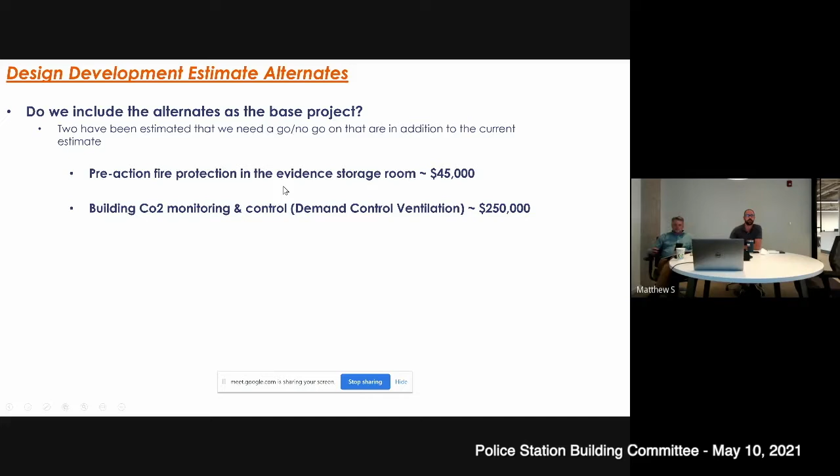I think the pre-action fire protection system was pretty well understood and pretty straightforward from what I gathered at the last presentation. So I'm not going to talk any more on that, but I did bring Brad from CES, and he's got a few slides on the second piece of this. So I'm going to turn it over to him. Sure. How's everyone doing tonight? So I did want to jump on this tonight to talk a little bit about ventilation within the building and demand control ventilation, just to help everyone understand what this add really entails.

So first and foremost, I want to start the conversation by clarifying that as our design sits today, every space within the building is ventilated to meet the current codes. If you recall from some of our previous conversations several months back, we're utilizing a dedicated outdoor air system to ventilate the building, which is a very efficient way of ventilating and provides very good indoor air quality. So that's kind of our base starting point.

Demand controlled ventilation comes into play where we can monitor CO2 levels and in fact reduce the amount of ventilation provided in a certain room. I'd say this is applicable to the training room, patrol, roll call, some of those spaces that can have high occupant densities for a time period, but then can be reduced elsewhere.

Jeff, did you have a question? No, I'm sorry. I was trying to make the images bigger. Oh, it said you raised your hand, so I didn't know if you were already questioning me. Yeah, whole thing's questionable.

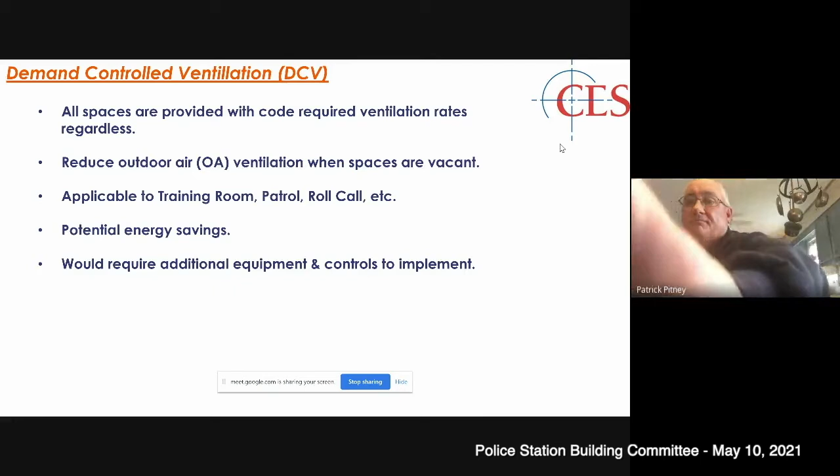So as I was saying, this would apply to spaces that have at certain times high occupant density, like a training room, but then at other parts of the day would have a very reduced occupancy density. What the CO2 sensors would allow us to do is monitor the level of CO2 in the room. And based on that, we can make an assumption of how many people are in the room and reduce the amount of outside air we're bringing into that space. And all of that is geared towards trying to save some additional energy.

So as you can imagine, if you have a certain space, you need to bring in a certain amount of air; you reduce it, you can use a little bit less fan energy to move that air. In order to implement this fully throughout the building, it does require some additional equipment and controls, which is where you saw that $250,000 number. And essentially what that's buying us is some additional equipment. So Matt, if you can go to the next slide.

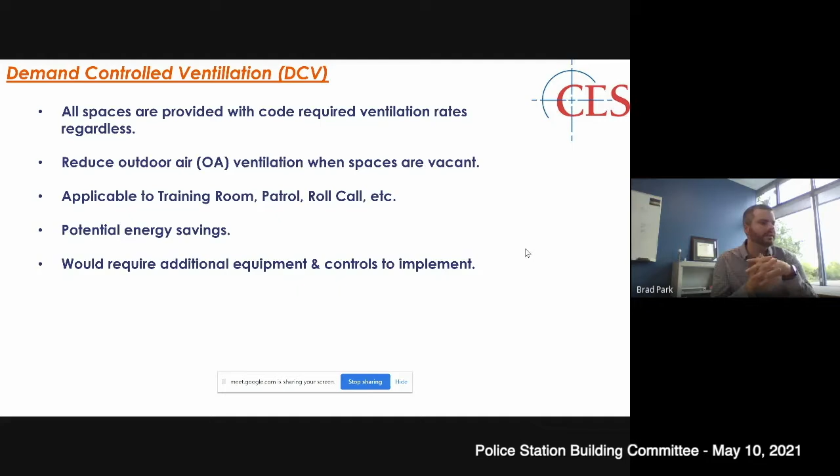Each one of those requires a couple different control points that get tied into the building management system, the BMS. So there's some costs associated there. And then just the number of them throughout the building.

Once you start playing with air volumes in the building, once you start reducing air in one area, you have to now have controls on all the rooms in the building, so that if we reduce the airflow in one room, we don't affect another room in the building. This is especially important on the exhaust side of things.

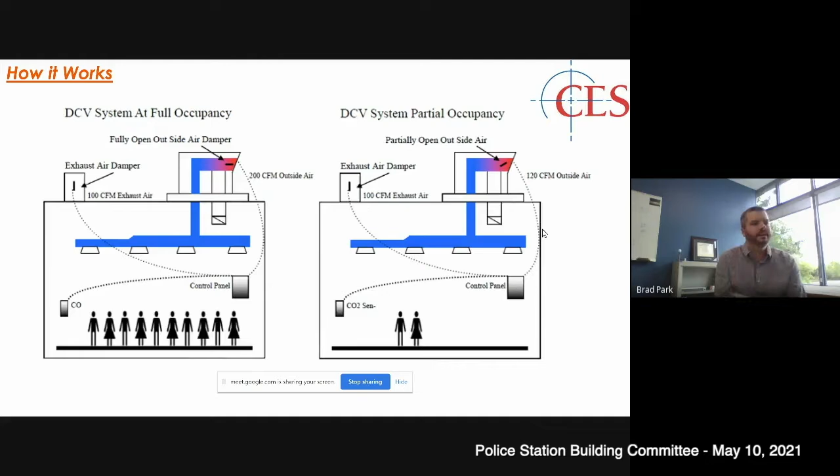So Matt, if you go to the next slide, I did a real brief evaluation of what this would look like. And the first cost, $250 to $285, that's around where the estimators were at. So it's somewhere in that ballpark.

And then from the energy modeling we've been doing, we know that our annual ventilation cost, the operating cost to operate our ventilation system, costs around $11,500 as it sits without demand-controlled ventilation. If we were to implement demand-controlled ventilation and reduce airflow when we can, we get that number down to $9,250. So the approximate savings is around $2,250.

Again, these are approximate numbers, but it's in that sort of ballpark. So you can get a sense of what this number is compared to what that first cost is. Now, ultimately, you are saving money, and we've had these similar conversations with other owners. And if you can get that into the project for what you've allocated in funds for the project,

it can be a good buy, because you are at the end of the day reducing your annual operating cost by a few thousand dollars, which is a positive. But if you looked at it on a strictly return on investment basis, it doesn't have a huge payback. And a lot of that just comes down to the amount of equipment and controls you have to add in to implement this.

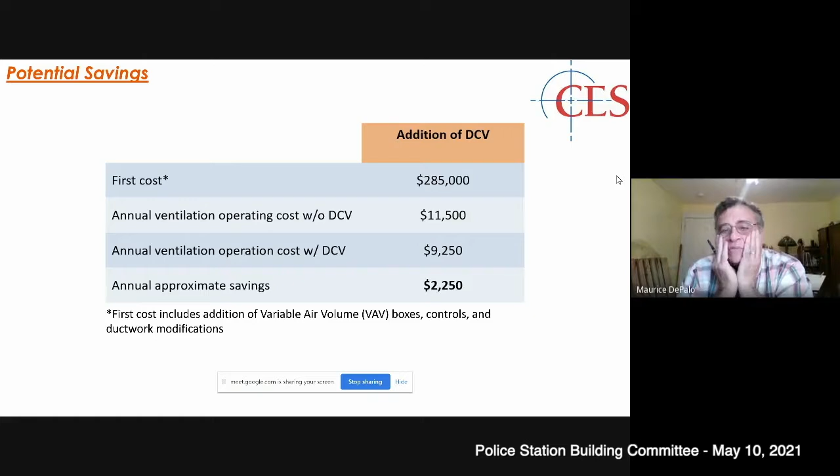To that, Brad, how hard is it to separate this piece of the system as an alternate? Pretty difficult because it impacts multiple trades involved. Yeah, it wouldn't be something that I would recommend doing as an alternate. It'd be difficult to document. Yeah, so to your point, Mo, this would be a vote to include this into the project, the hard bid. Okay. Anything else, Mo?

Okay. Brad, I guess my last question is, let's say we decided not to move forward at this time, but in 10 years or so, all the ventilation standards changed and it became required. How hard would it be to retrofit something like this in? I mean, it's a substantial project, don't get me wrong. You wouldn't be replacing the entire HVAC system. It would be a modification to the existing system that's in place, and that could be done.

You still have to take down ceiling tiles and get above the ceiling and cut in some different ductwork here and there to make some modifications, that sort of thing. So it's not something you're going to do in a weekend, but you're also not tearing out the whole thing and starting over. I don't know if that helps answer your question. So it's something that's doable then. It's doable. Yep. Okay. All right. Very good. Anything else?

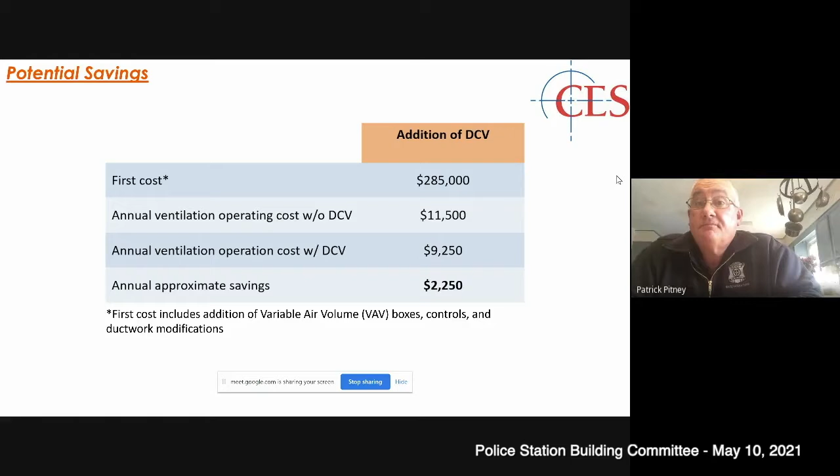All right, Matt. What else do you have for us? All right. Thanks, Brad. So next, we're gonna touch on the updated stormwater management plans and site plans.

So just as a recap, we did our geotechnical borings last year, and they identified a certain amount of groundwater at a certain depth, and then we dug our test pits last month, and they told us a different story of a more consistent shallow profile. So in order to maintain our schedule and get early site packages released and keep everything moving forward, we prepared a quick conceptual stormwater management plan that was presented to the Conservation Commission a few weeks ago.

Those were really just to show that we could go from an all underground detention basin system to an above ground system. We recognized that they were not an ideal configuration aesthetically and with the site. So we've gone back and tried to develop a cohesive site plan that incorporates some better stormwater management practices throughout the site that would be an aesthetically pleasing and more attractive solution.

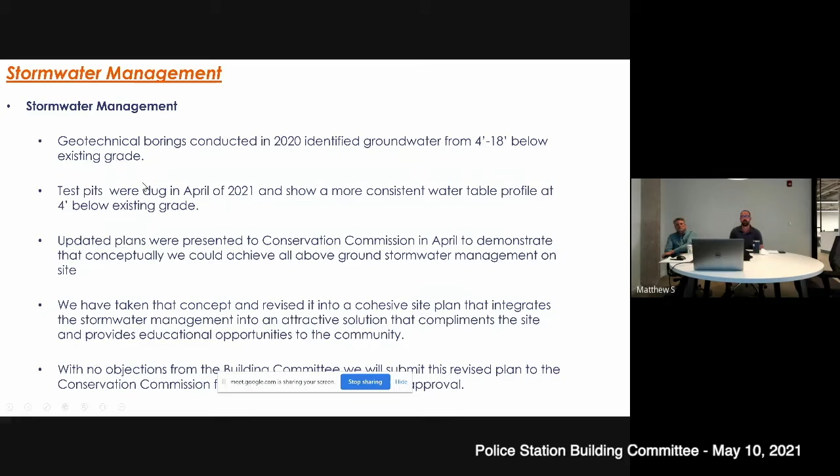And we also looked for some educational opportunities in conjunction with some of these systems too, with signage and the like. And so we'd like to show you what we've come up with, and the hope is that we would get your stamp of approval to proceed with these for the Conservation Commission hearing coming up a week from tomorrow. So with that, I have Fuss and O'Neill on, and I think they can present this. I'll just go through these.

So just as a reminder, this was where we were with the design development package that went to the estimator. Again, showing substantially that the system would be underground detention below the parking and would infiltrate the stormwater into the ground. That would not be practical based on the water table that we have.

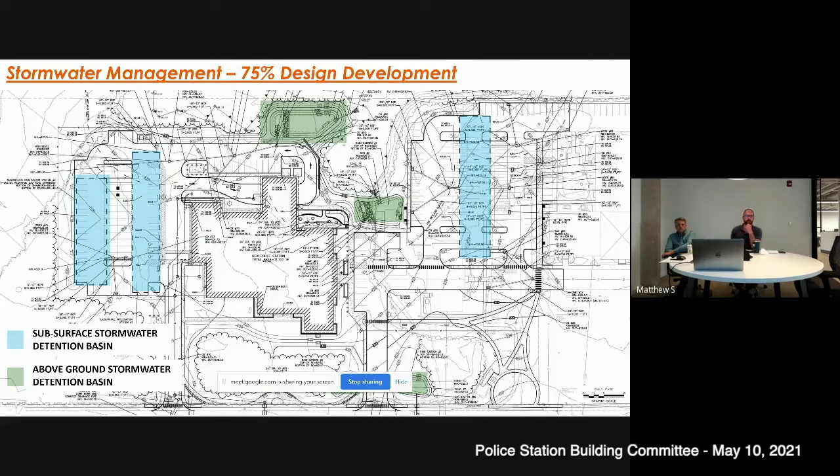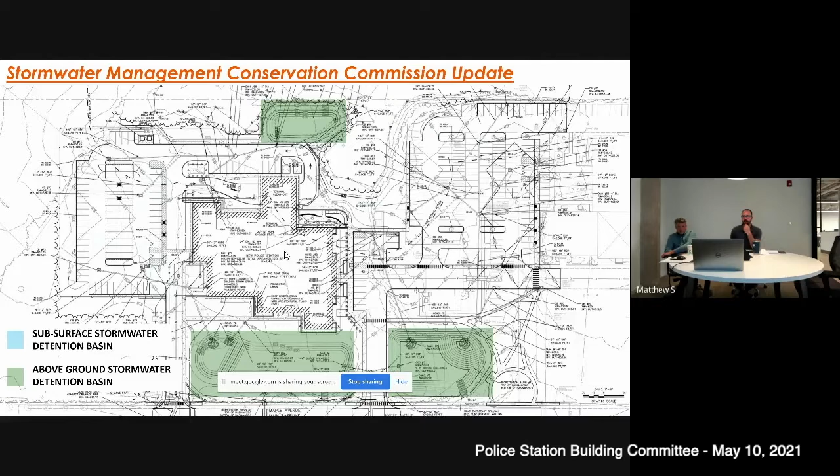And then this was the proof of concept that we presented to the Conservation Commission last month that moved everything to above ground, showing the basins here in the front. And of course, that is not the preferred method. So we went back to revise this and come up with a better solution. Victoria or Dan, this is the latest.

Victoria? Victoria's on mute. I don't know if you guys, okay. Can you hear me now? Yes. You can? Okay. Do you mind if I share my screen just so I can talk through some of them? Sure. Okay. Okay.

Just to highlight some of them, stormwater management will be tricky on this site due to the high groundwater elevations, not only for peak flow attenuation, not increasing flows off the site post construction, but also in being able to provide adequate water quality treatment, which is why there is the need for the above ground and underground. So as Matt showed on his plan, there are four above ground areas which help us meet both the water quality standards and the peak runoff rates.

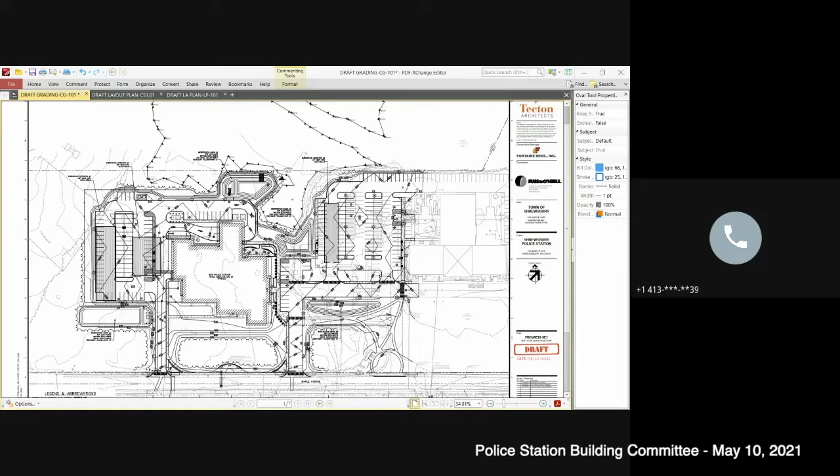And in terms of landscaping and the rain garden education pieces, this basin right here and this one as well would be ideal locations for educational signage related to the rain gardens, so that visitors to the site can see those. And I would like to say there would be no mulch proposed in any of these areas. They would be a mix of low maintenance plants, but also trying to spice in some color. So with that, I can stop presenting and let Matt take back the PowerPoint if you'd like.

Yeah, I'll share my screen again, and I have some images of what these things are going to look like. I think the perception looking at them on the plan is that these are pits filled with dirt and debris, and these are certainly not that.

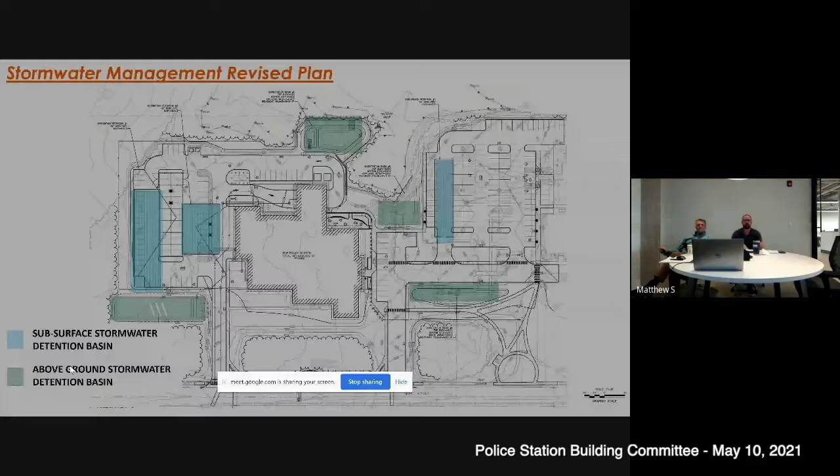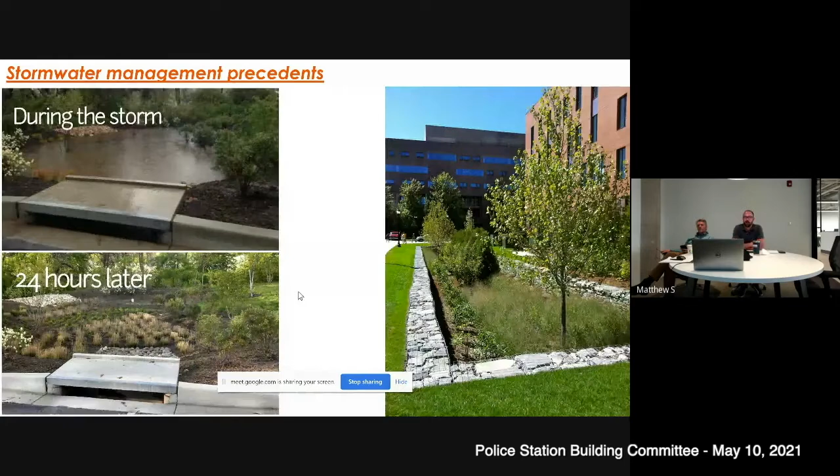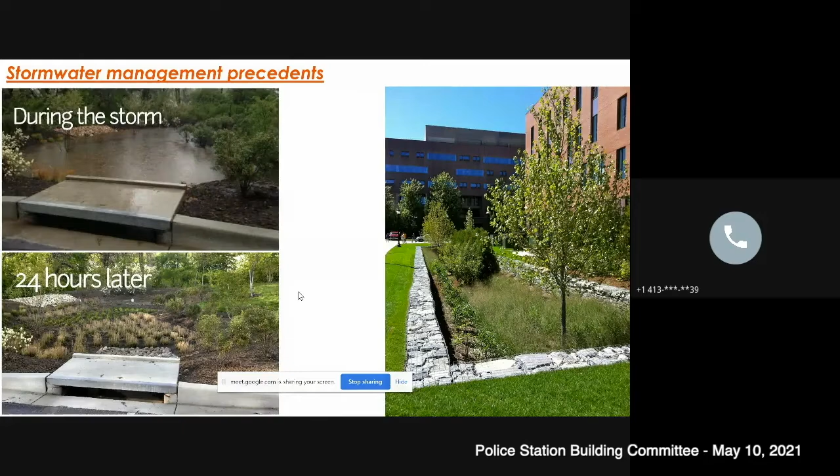So while you may see from the contours that it looks like it's a 4-foot deep depression, there would be an outlet pipe that would be placed anywhere between 1.5 to 2 feet above the bottom of the basin. That way, once it gets to that level, it may fill up more, but it will be discharging at the same time.

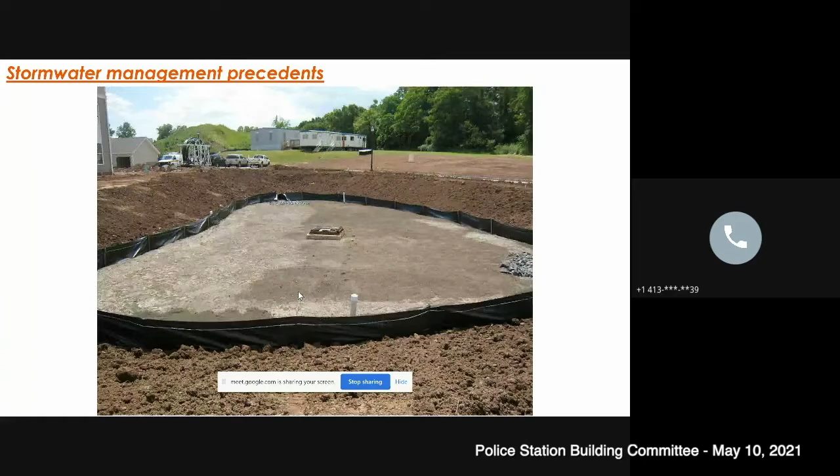The design, the plantings are selected such that they are able to be submerged underwater for these types of periods of time. But also we're trying to find a balance where they don't need to be maintained as much, but they won't become very overgrown and unruly either. Any questions, comments?

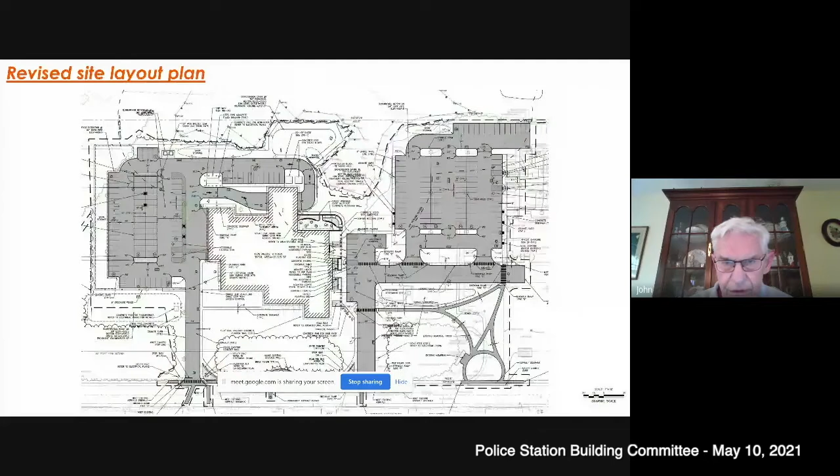I have one question. Sure, go ahead, John. Now that we've increased the parking area with pavement, how much more volume are we introducing into the storm system? Is there a guess? From which pavement area? All the parking area that we've got, now you're introducing with the drain systems, not so much the rain gardens, but the parking areas themselves. Yeah. Where's that water going?

I don't have the exact numbers from that. So we have accounted for the sort of existing impervious. So even in the existing area that's paved, because we're repaving it, it would still be subject to the water quality treatment volumes, where you treat 0.8 of an inch of water for that area. And in the new area, you would treat the 1 inch.

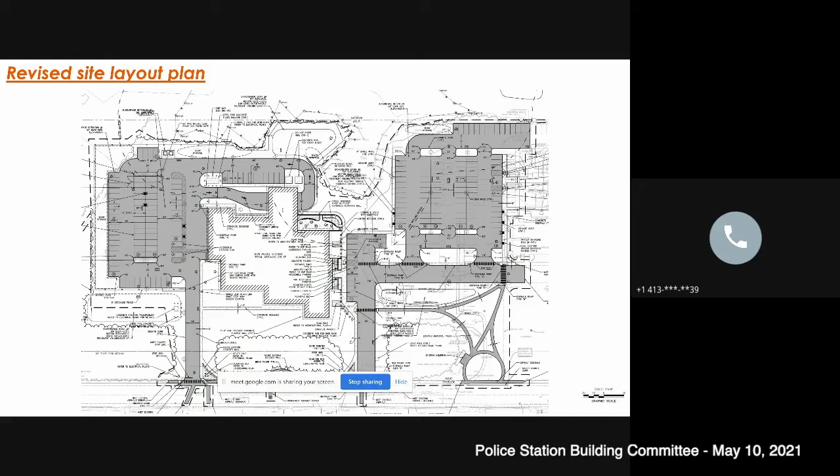I know from the water quality volume standpoint, where you take the 0.8 inches for existing impervious and then you add 1 inch for new impervious, those two things combined require about 12,750 cubic feet of storage to meet the town's stormwater management bylaw in terms of water quality volume. Thank you. Victoria, I don't think you mentioned that you had that underground pipe storage system as well. That's where a lot of that water goes.

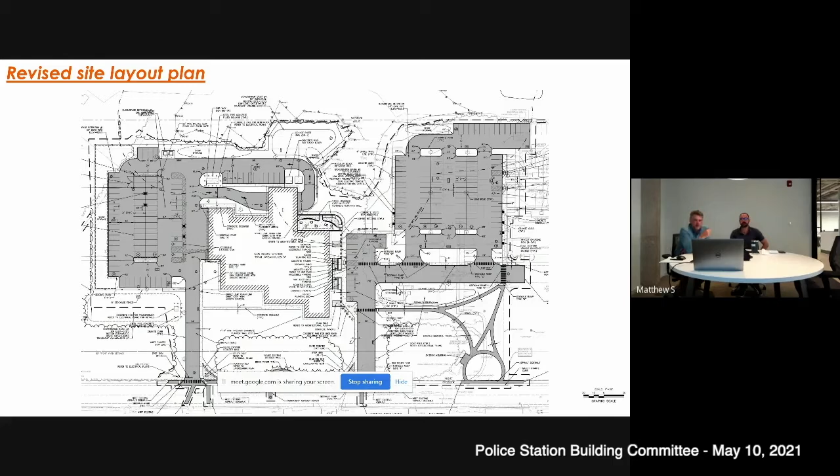So that is, and forgive me because those are more in the technical reports. So the volume that I just quoted is to treat water quality volume. So attenuating flows for different things, you do it for multiple design year storms. So you'd have to forgive me that I don't have a printout for that. We had planned on trying to make sure that these areas were okay with you, but I can definitely get you that number, just not right at this moment.

Victoria, the goal of those underground systems is to provide a significant enough volume so that as that's released, you don't impact any of the downstream stormwater systems or release anything more to the wetlands than what's already going there. So the sizing is shown in a manner so that we maintain those flows and those volumes so that you don't increase and overwhelm the downstream system.

Mo, you have a question? Yes, Pat, thanks. I don't know who to ask, so I'll direct it to Matt. Matt, the plan that was presented to conservation, I know it was just to show that the water issue could be addressed. But is that handling this? It is handling the same volumes as what this plan is showing right now. Is it built to the same standards for the same amount of water? Yes. I believe so. Correct.

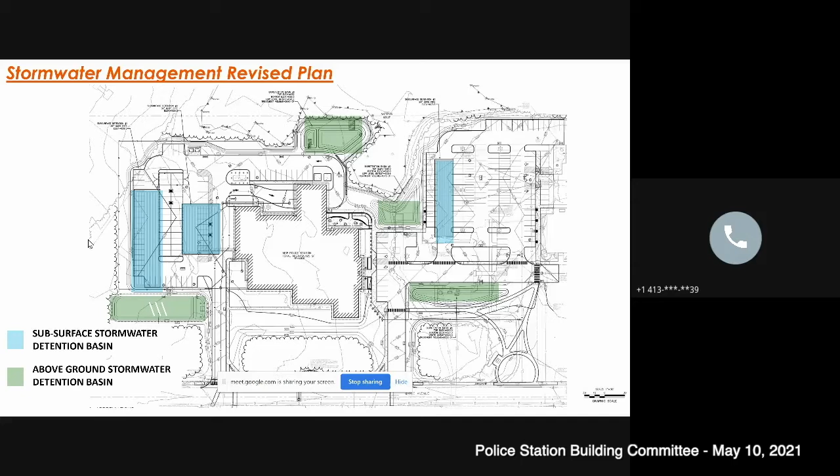And I think some of it, Victoria, too, is the overall elevation on the site is so flat. In order to treat the water associated with the parking lot on the right-hand side on this picture, that was the purpose for keeping the smaller basin that's tucked in between the sidewalk and the roadway. So, even if we were to expand to the left, I think we still would need something in that center area in order to treat the water coming from that particular parking lot.

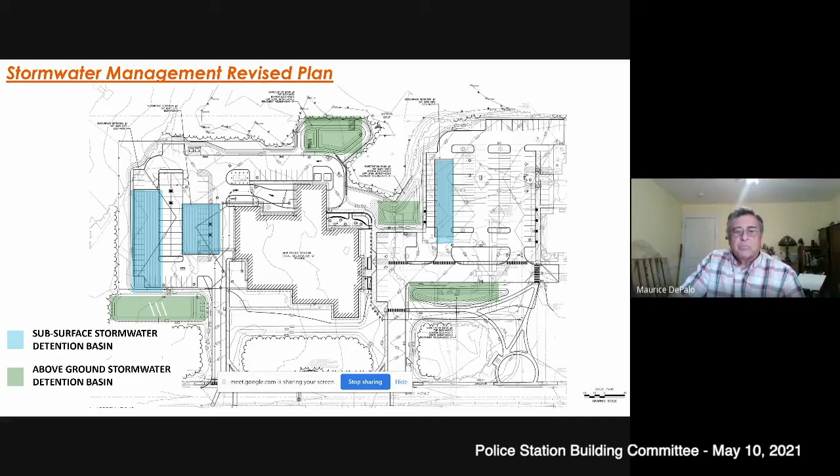Okay. I think that just answered my question. Thank you. John, I see your hand up. I'm sorry, I made it by mistake. Sorry. Okay. I'm good. They answered my questions. Thank you. All right, very good.

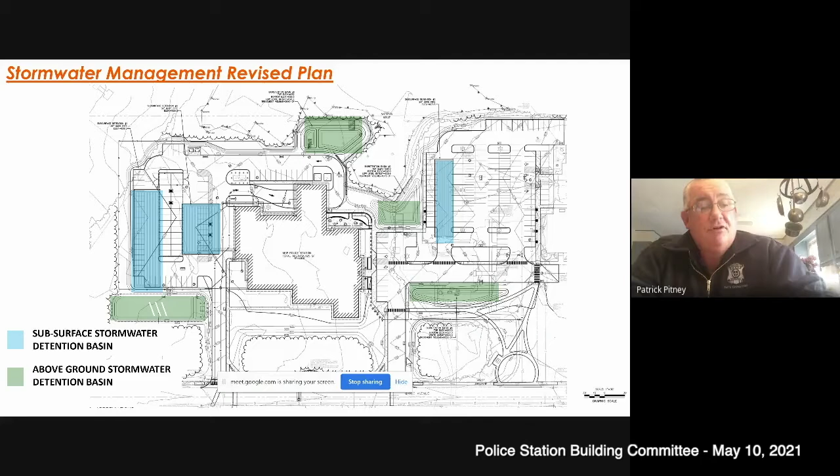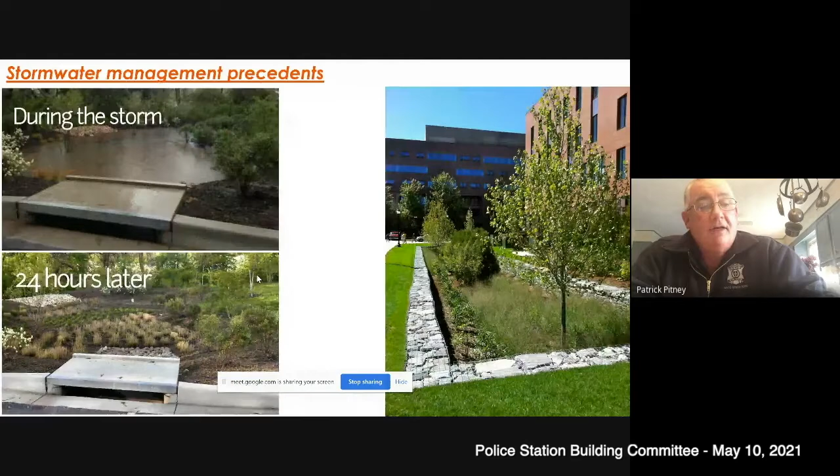So I keep looking at these rain gardens and I keep having the same questions. Number one, the startup cost versus not doing rain gardens. And then the ongoing cost, especially from a maintenance standpoint, not only in terms of cost, but in terms of the pressure it puts on public buildings and grounds to maintain those.

I mean, there is maintenance associated with them. Once they're established, they tend to be similar to any other landscaped area. They'll be planted with shrubs and other types of plants, so it would be similar to any other densely vegetated, landscaped area. The added piece of it is that you will need to monitor any of the outlet structures for debris or anything like that might clog them. Your Dunkin' Donuts cups and things like that.

Some of the ones in the pictures are much more urbanized, so they have a lot more of a hardscape treatment. This picture shows a less hardscape treatment. So there is maintenance of the plantings when they're planted, and then once they get established, a lot of those shrubs are only cut back, I believe, once a year. So your landscape contractor, or your in-house forces, wouldn't have to be in there every week or every 2 weeks like you would with a mowed area. Yeah, but there is some work associated with it.

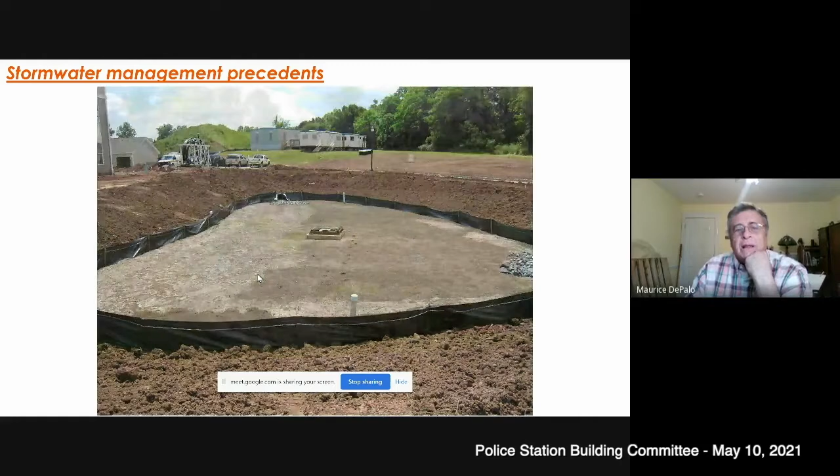Yeah, Ian, could you go back to that picture you had with the large, nice-looking rain garden? Thank you. I thought I heard Victoria say there was no mulch in these things. Is that correct? Typically, you don't want to put mulch in them. So we are not proposing mulch, right. But in the example photos, yes, there's some that have mulch.

Okay, so I'm guessing this is kind of a coarse soil, so the water would filter through it. Is that right? Yeah, the bottom of the basins have a specific soil media. It's about, I think, Victoria, ours is 2 feet thick in this particular detail, but it's a specific planting media that is specifically to filter the water as it goes through.

So my question is, I'm seeing a lot of open ground there. And being somebody who hates weeds, I'm seeing like a weed nightmare there. I mean, how do you stop the other stuff from growing in, or do you care? Well, this particular one has quite a bit of open space. What we would prefer to do is to get initial density with whether it's shrubs or some of the plugs that we would put in, and then the grass, especially in those front two areas, would go right up to the edge of it, and we have grass along the slopes because it would be part of that maintained lawn area or right adjacent to the maintained lawn area.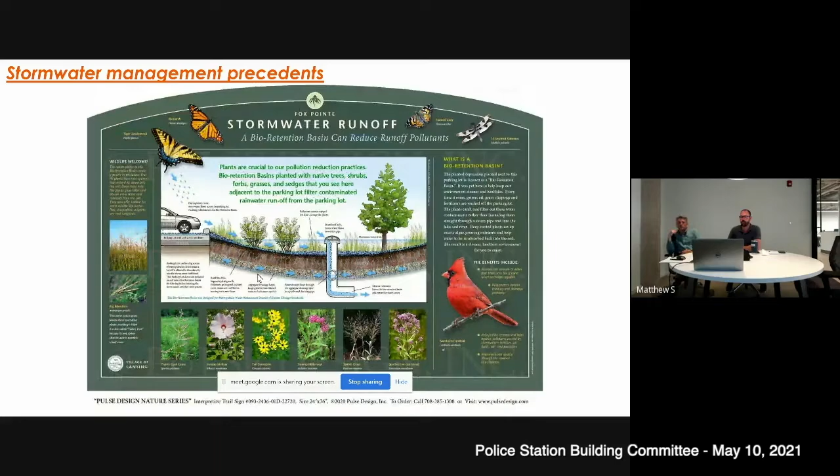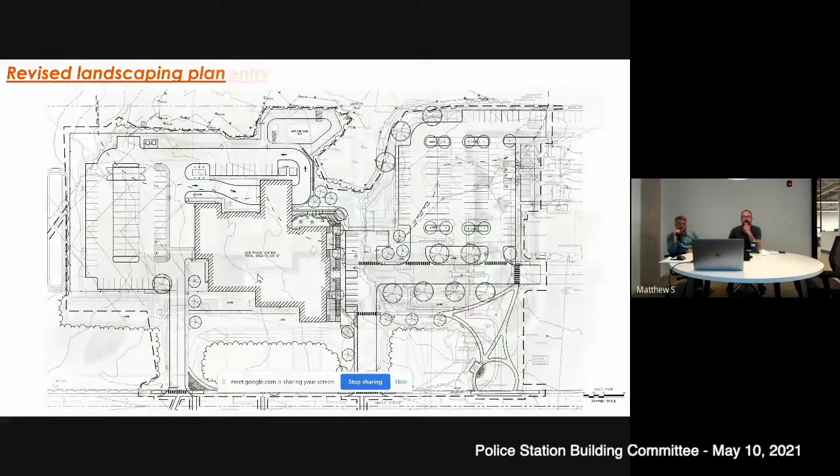And the last piece is just to talk about the landscape development at the plaza, taking that just a little bit further from the last time you guys had seen it. This is just a rendered site plan of the front entry area here. One thing that we had been talking about with this new design, where we're terracing down into the plaza area, making this more of a cohesive landscape, is the maintainability of these beds here. It's kind of difficult to get a lawnmower in there. So we would propose something that's maintenance free, or a once a year maintenance item.

Infilling this with some taller plantings, some shrubs, and then going with a no-mow grass that you mow once a year, or like a pachysandra, something that would fill in here. And then making sure that these planters and these bollard lines are well defined. Anybody who watched the news over the past week knows how important this sort of mitigation strategy is for the front entry of a police station. So this is readily apparent right now.

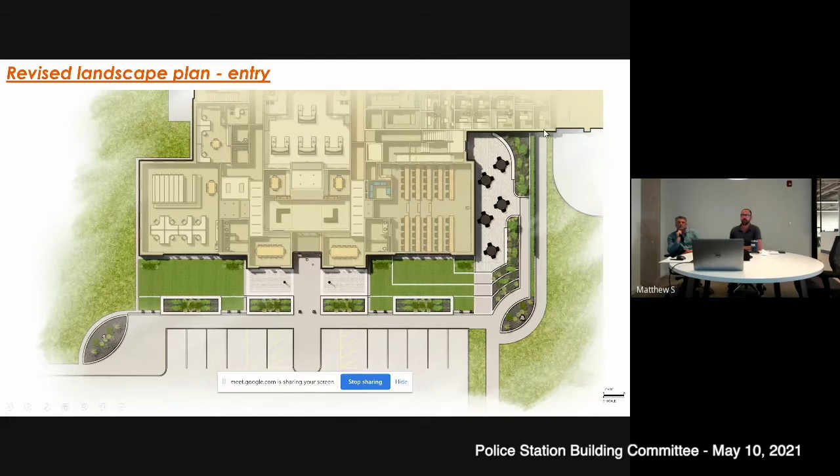And then we also have some renderings showing what this looks like in 3D, and I guess there was a request to look at putting a screen or fencing here to visually screen off the prisoner release area from the plaza below. So this is an aerial view of this. This is without the screen, just creating a hedgerow that creates a buffer between this pathway and the plaza itself. This being our proposed memorial area, and right now we're also showing this as one of the locations for the flagpole, with the other one over here.

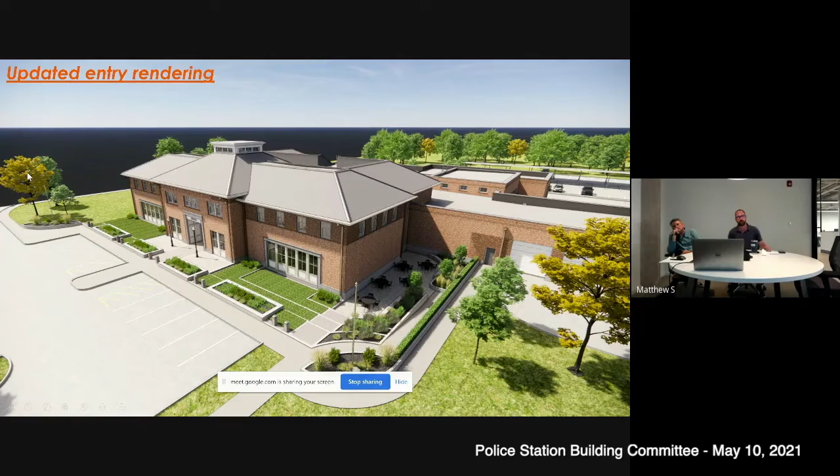We're showing it that way because we like vertical anchorage of the corners of the building, and we think it builds up a nice composition. But if we want to have the flagpoles more clustered, we can put them both over here or bring them closer to the building. We're okay with it either way. But you can see how we're gradually stepping down into the plaza now, instead of a site cast concrete staircase, and that the ramp flows down nicely. So this is a little bit more of a cohesive flow.

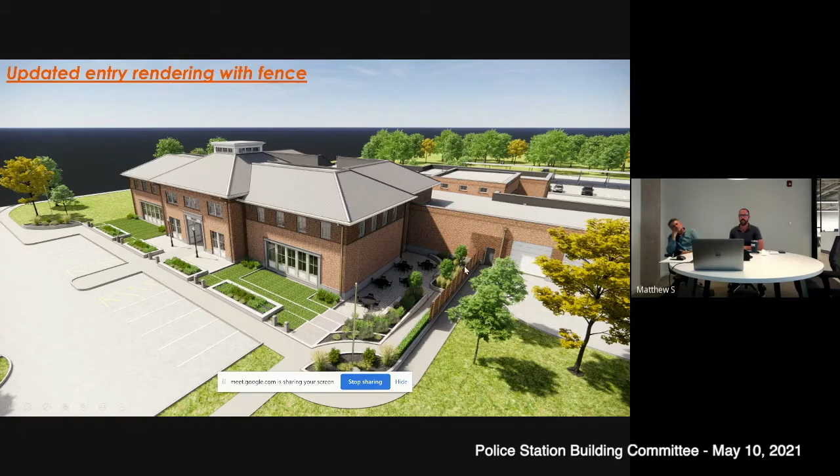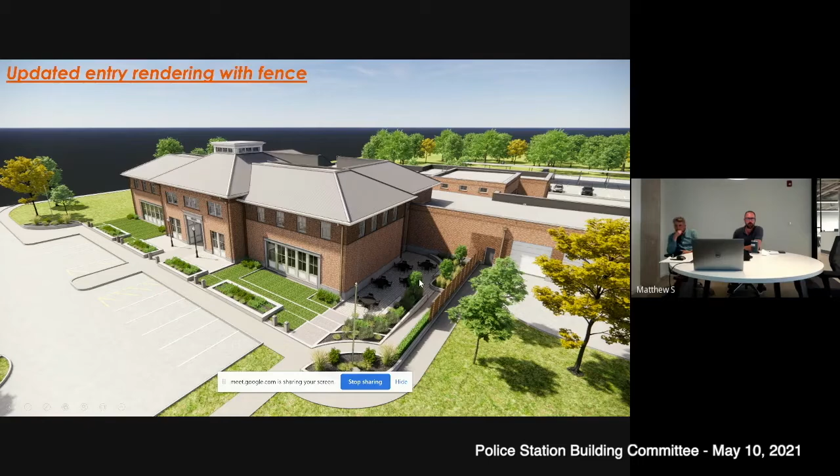And from inside the plaza looking back up towards Town Hall. So this is what it would look like as you come out of the training room. And again, with the fencing added in, if we choose to have that in. So right now the hedgerow would provide some screening. The sidewalk line is really down here. But if we wanted additional screening, we could add in that fence to achieve it.

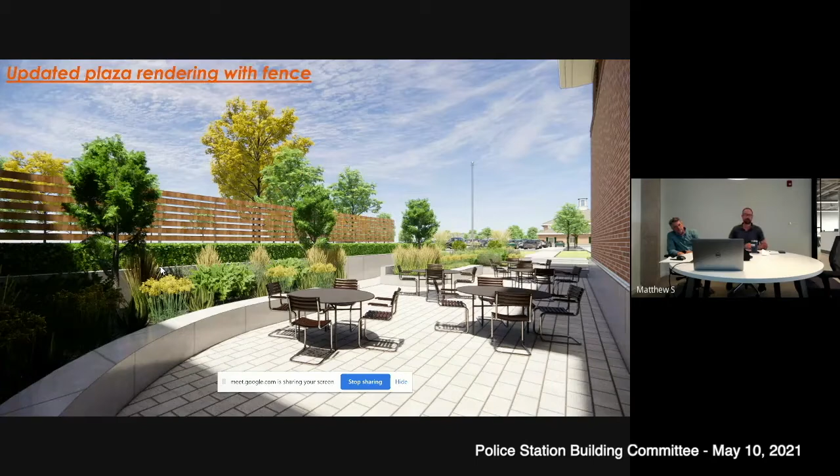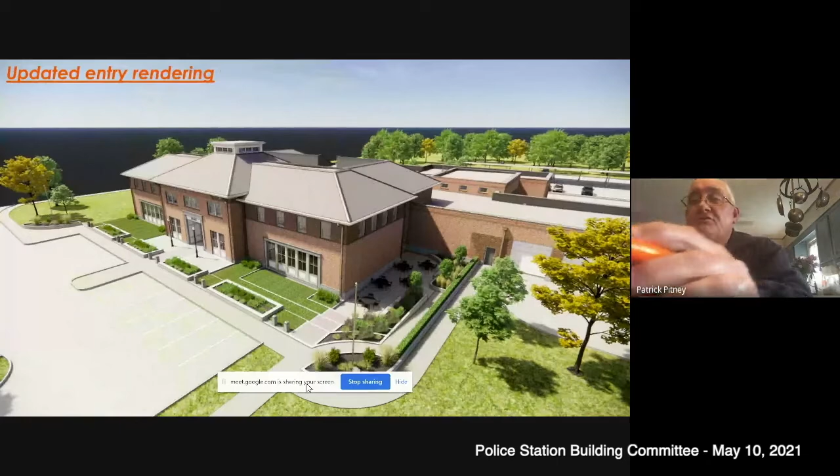Okay, Matt, can you do me a favor? Can you go back to that first 3D rendering? I just have a question. I may go back to the rain gardens a little bit. So I'm going to point to the screen too, like you can all see it. But all the protection areas in front, the balusters or whatever you call them, the four concrete boxes in front there. Yep. Those are not the rain gardens, are they? No, they are not. Could they be?

So these are elevated, so they wouldn't quite work like that. These are not only to, one, reduce the scale of the building visually from the street and provide some visual interest in seating walls and things like that. This is also there to prevent vehicles from impacting the building. Right, I understand that. I didn't know if there was a way to integrate those in where they could be multifunctional.

You know, Patrick, we did something similar to that in Pittsfield along North Street. The issue here is that the way the grading is, we're obviously grading away from the building, so we don't have much of a way to get any water up there that needs to be treated. The requirements are to treat the runoff from the parking lot or where there's vehicles. So it's a cool idea, and we have done it.

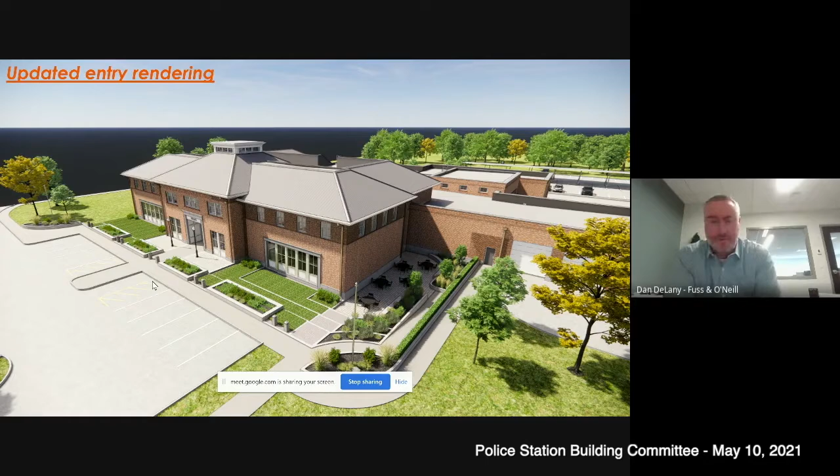There we had the ability to do it because we just picked off the gutter flow on a street, and we're able to do it up there in Pittsfield, and it worked out really well. It did look actually quite similar to this. It was pretty cool, but just looking at the grading while you're talking, I don't think we can make it work here, but it's a cool idea. Okay, just thought I'd ask.

That's all. All right. Mr. Chair, if I may. Yeah.

Keith. I just had one comment, and I think Matt and your landscape design, we should look at that grass in the front. This place will have a full-time custodian, so we will have somebody available for maintenance. My experience with no-mow grass is it turns brown. I would rather see something that's a drought-tolerant grass that keeps the front of the building looking nice.

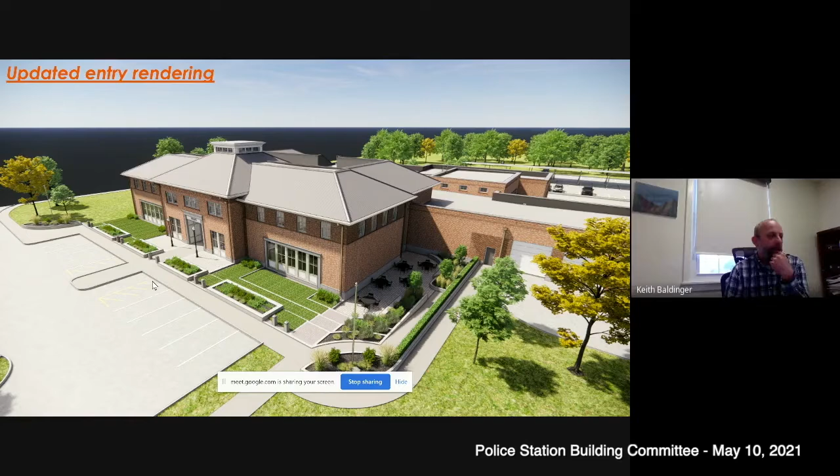I think there's areas on the property we could do the no-mow style fescue, but I don't think that's it. I think we want the front of that building to. But I think we can work with, especially the way that you did the step down. I think we can manage to maintain that with a mower. Okay. Yeah, no problem. Pat, Chief Anderson here. Thanks. Yes, Chief. Go ahead, please.

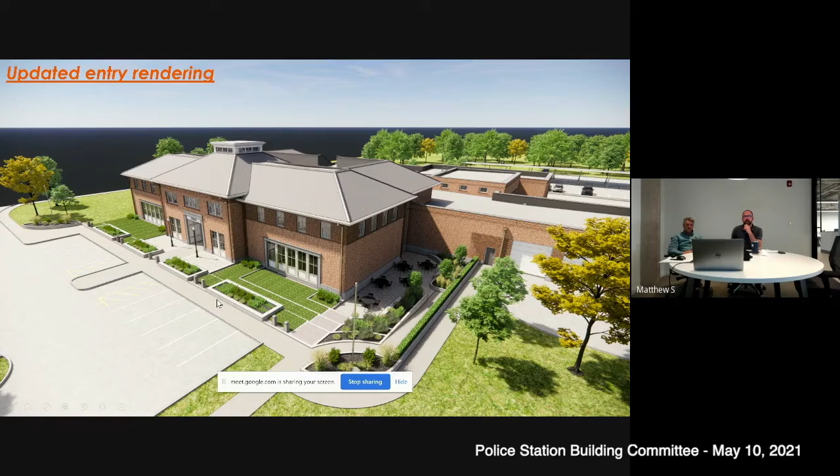I agree with Keith. On another note, Matt, I can't tell those plantings. How tall are those? They look small, but it might just be from the angle. These? Those boxes in front of the station. So this being like a sitting wall, this is like 18 inches, and then the plantings would probably be another 18 inches, 2 feet above that, depending on what we specify. We haven't necessarily picked anything yet.

Yeah, I'm just thinking, is that something that's tall enough to stop a car? Or is it going to act almost like a ramp? Because they got a pretty good running start there if someone, God forbid, wanted to breach the building. Yeah, it should be. If we want to raise it up, we can certainly raise it up a little higher. We can also do some steps and things like that. So there's solutions that we can accommodate. There's a raised curb along the front of the building as well, right? Yes, granite curb.

Just a thought. I don't know what the plantings are going to be, but could it be possible to keep it like that and then put a couple of those poles on the inside? You wouldn't be able to see it if you had some tall grass or some plantings. Sure. Well, extra protection. Yeah. I think that's a good point. We like to get these so an SUV is going to get hung up on it. Obviously, if somebody comes with one of these monster trucks, it's a different game altogether. But normally, we're trying to get most vehicles hung up on the planter.

The thing that we tend to see too is what you saw over the weekend, Chief, and that the bullseye is going to be the front door. Yep. Yeah, but what I'm thinking, Matt, is where those windows are on the right side of the building, they're low. So if that car can breach that area, it can actually go right into the building. Right. And especially on the right-hand side of that building, where they could have a running start from the drive. They could build up a lot more speed than, say, on the front door. Yeah. Yeah, we'll look at the design of it and we'll make it a little bit more robust, Chief.

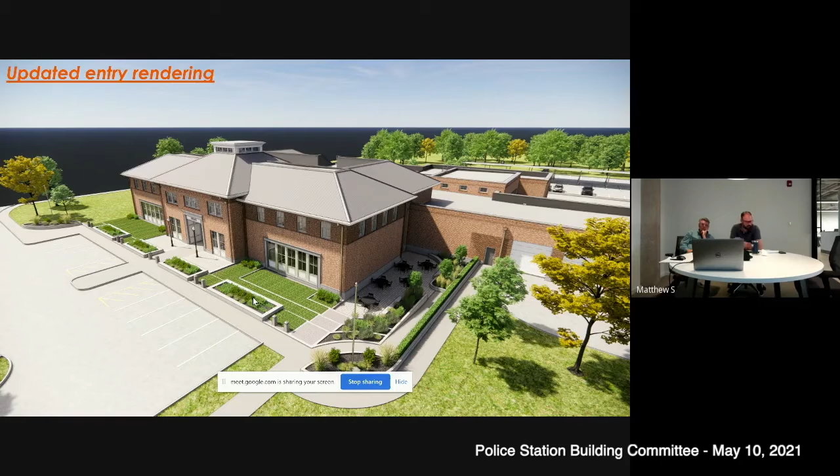Okay, because what happened in Leicester, thank God he didn't have as much of a run time, I guess you'd call it. But right there, as Pat said, there's a long distance right in the front to the other side of the town hall. Yeah, yeah. Okay. Okay, anything else around the design?

Okay, thanks, Matt. That brings us to a report from the construction manager. Good evening, everybody. Keep it brief, like Neil. We've been working with Tecton and CMS, just developing all of our early bid packages, coordinating our logistics, getting schedules finalized. Everything still looks really good. We're keeping an eye on all the material and all the craziness going on in the world to make sure that doesn't have any effect or delay on us. So everything's looking good. And we're looking forward to getting these plans out on the street to start early packages shortly. So that's all I have for tonight.

Okay, thanks, Ryan. Any questions for Ryan? Okay, very good. So next, we got several things to review and act on based on the conversations that we just had and from previous meetings. But item number 5 is review and act on the amendment for LEED certification additional services. So we've all seen the numbers on that. I did have one question on that.

And that is, okay, so let's say we proceed and we get certified. Is there a recertification over time? Is this something that needs to be recertified every 5 years, 10 years, or is it a one and done deal? No, well, it's one and done. One and done. Okay. That answers that question. Thank you. So what are the feelings out there?